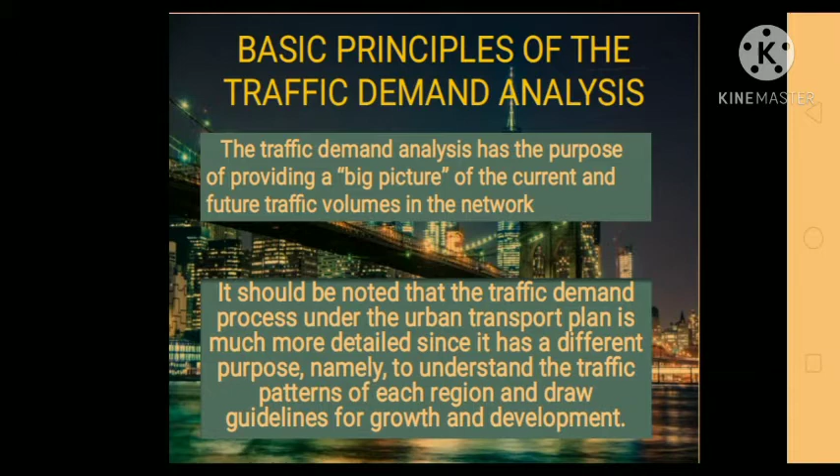Classification. Road classification is the orderly grouping of roads into systems according to the type and degree of service they provide to the public. The basis of this classification is the materials, location and function, traffic volume, economy, traffic type, rigidity, and topography.

So merong 4 classification ng roads sa neighboring countries in Asia. The primary, class 1, class 2, and class 3. Primary, access-controlled motorway. Class 1, 4 or more lanes highway. Class 2, 2 lanes. Class 3, 2 lanes pero mas narrow.

Since most of the Asian highway member countries have their own design, the revised classification and standard for the Asian highway was simplified to provide the necessary minimum standards and guidelines to facilitate international road traffic. Saka yung primary class ay access-controlled motorways used exclusively by automobiles. Access to enter the motorway is at grade-separated interchanges only.

Motorcycles, bicycles, and pedestrians will not be allowed to enter the motorway in order to ensure traffic safety and the high running speed of automobiles. Sa Class 3 naman, can be used when the funding of the construction and or land for the road is limited. The type of pavement should be upgraded to asphalt concrete or cement concrete as soon as possible in the future.

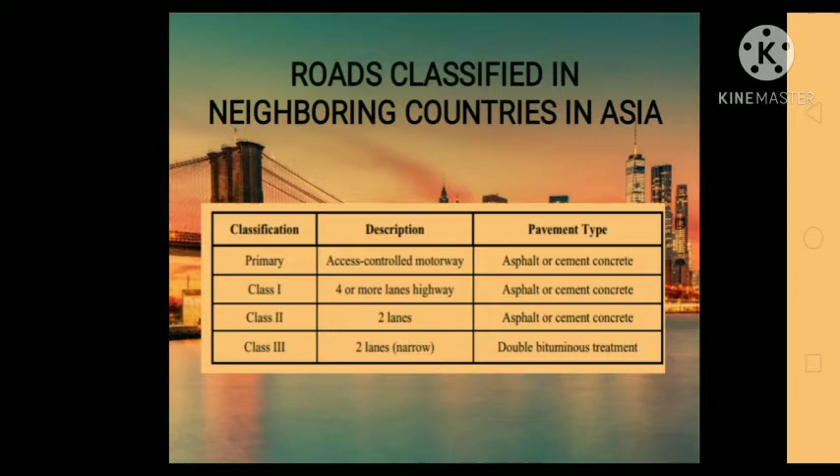Take note that the classification of road is determined as follows using passenger car unit or the PCU as an index presenting traffic volume. Sa neighboring countries in Asia ay may 4 classification of roads. Sa Philippines naman ay may 8 classification of roads.

Una ay ang national primary. Directly connects major cities, at least around 100,000 people, cities within the metropolitan areas. Pangalawa ay ang national secondary. Directly connects cities to national primary roads except in metropolitan area. Directly connects major ports and ferry terminals to national primary road. Directly connects major airports to national primary roads.

Directly connects tourist service centers to national primary roads or others. Directly connects cities not included in the category of major cities. Directly connects provincial capitals within the same region. Directly connects major national government infrastructure to national primary roads or other national secondary road.

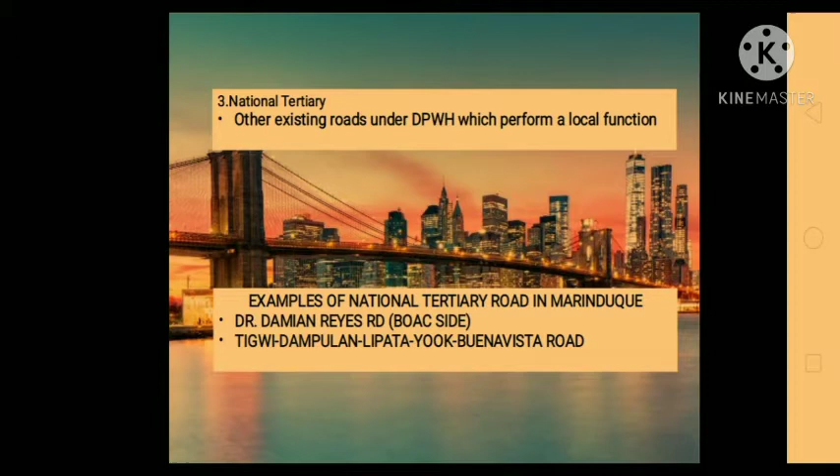Ang ikatlo ay ang National Tertiary Road. Other existing roads under DPWH which perform a local function. Ilan sa mga example ng National Tertiary Road dito sa Marinduque ay ang Dr. Damian Reyes Road, Boac side. Mula Tigwi, Dampulan, Lipata, Yook hanggang Buenavista Road.

Number 4 is the provincial roads or local roads. Connect cities and municipalities without traversing national roads. Connect national roads to barangays through rural areas, connects to major provincial government infrastructure.

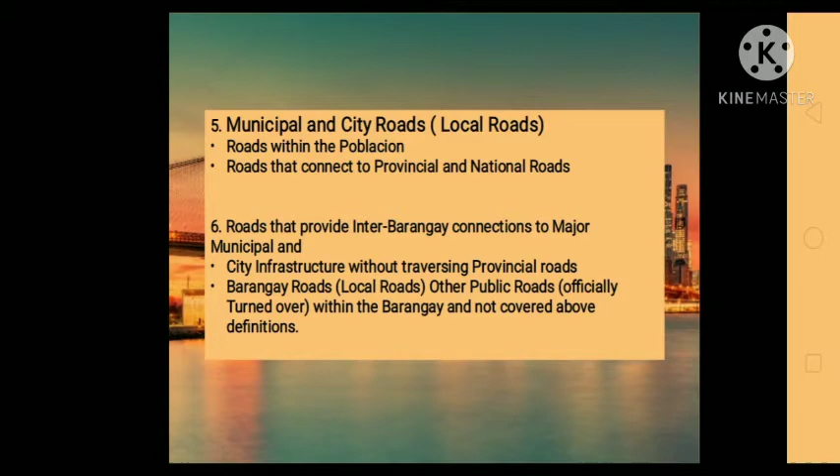Ikapito ay ang expressways, highways with limited access, normally with interchanges, may include facilities for levying tolls for passage in an open or closed system. Pangwalo ay ang bypasses. Bypasses are roads or highways that avoid the built-up area, town or city proper to let through traffic flow without interference from local traffic, reduce congestion, and improve road safety, where a toll for passage is levied in an open or closed system.

So, ilan sa mga bypass road dito sa Marinduque ay ang ongoing construction of Boac-Mogpog Bypass Road, ongoing construction of Gasan Bypass Road including right-of-way and bridges.

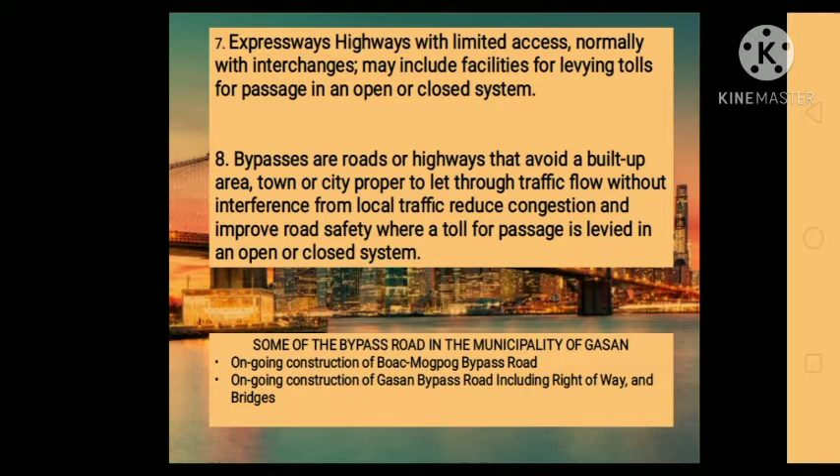So, ang next naman po ay ang road patterns. Road patterns are very essential in the development of the settlement of a city. However, recently, development in cities does not give importance to the study of road patterns, giving rise to numerous roads that are not interconnected. Housing and commercial developments are built far away where roads are very distant from the center of the town. The increasing distance between the residential and commercial hub of the city increases the dependency upon cars for the daily travel chores each household member makes frequently. The road patterns also increase the response time emergency response vehicles take to reach a certain place.

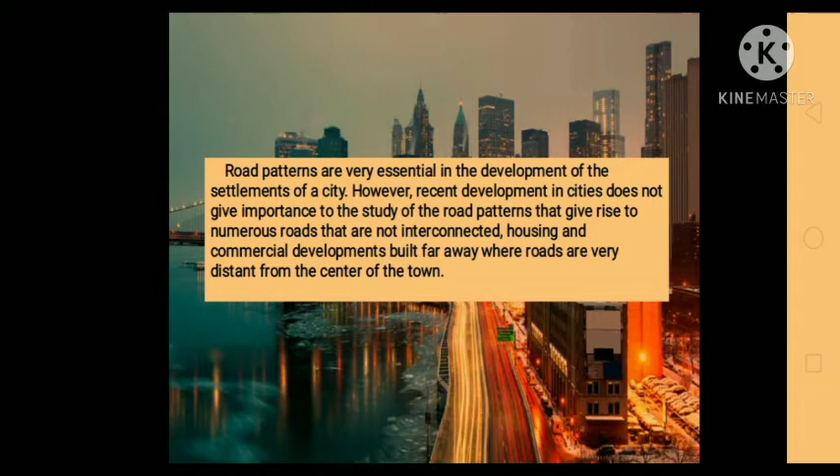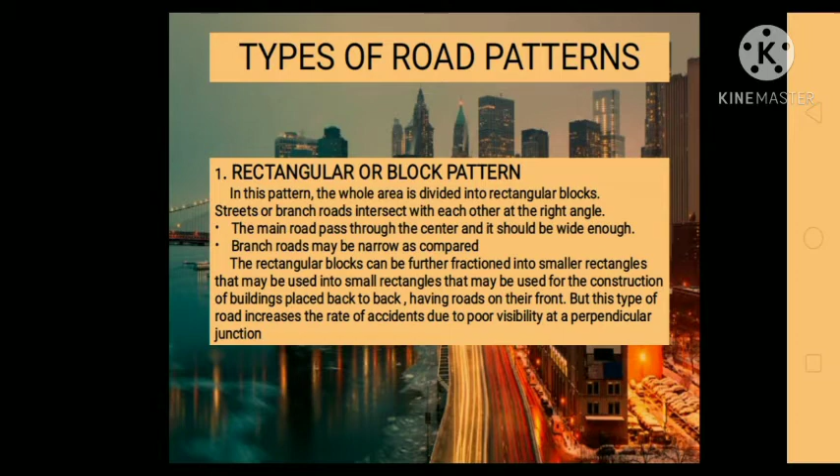There are 6 types of road patterns. The first one is the rectangular or block pattern. In this pattern, the whole area is divided into rectangular blocks. Streets or branch roads intersect with each other at right angles. The main road passes through the center and it should be wide enough. Branch roads may be narrow as compared. The rectangular blocks can be further divided into smaller rectangles that can be used for the construction of buildings placed back to back, having roads on their front. But this type of road increases the rate of accidents due to poor visibility at a perpendicular junction.

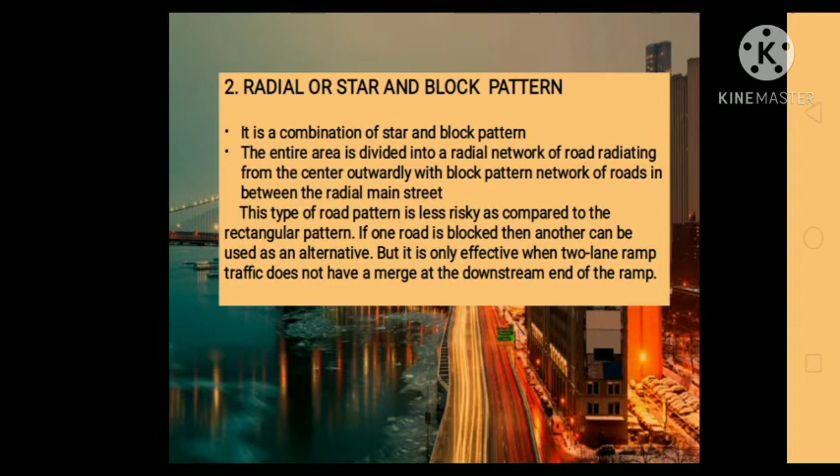The third one is the radial or star and circular pattern. The main roads radiate from a central point and are connected with concentric roads that are also radiating outwardly. Using a circular pattern in place of traffic signals reduces the possibility of rear-end crashes. But this type of pattern affects the driving ability. Mainly old drivers face this problem due to declines in vision, hearing, and cognitive function.

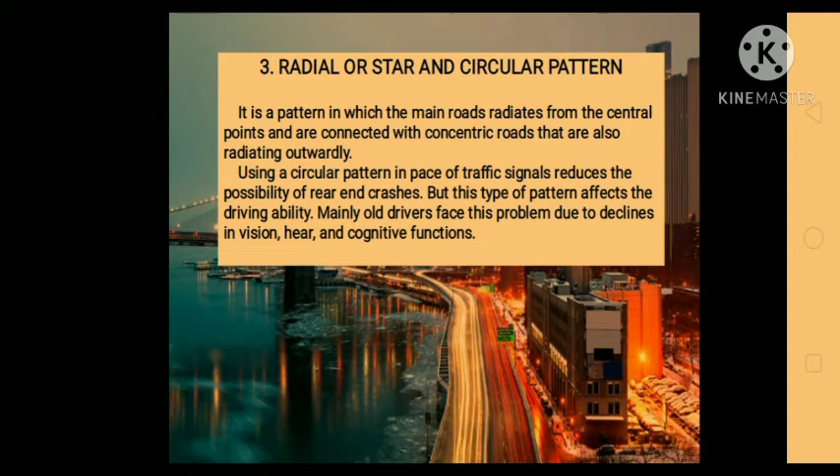Number 4 is the radial or star and grid pattern. A radial network of roads originates from the center outwardly. Then the main radial streets are interconnected by providing a grid pattern. This type of pattern increases the efficiency of land usage and unit density. It provides high safety to vehicular traffic with a high proportion of three-way intersections.

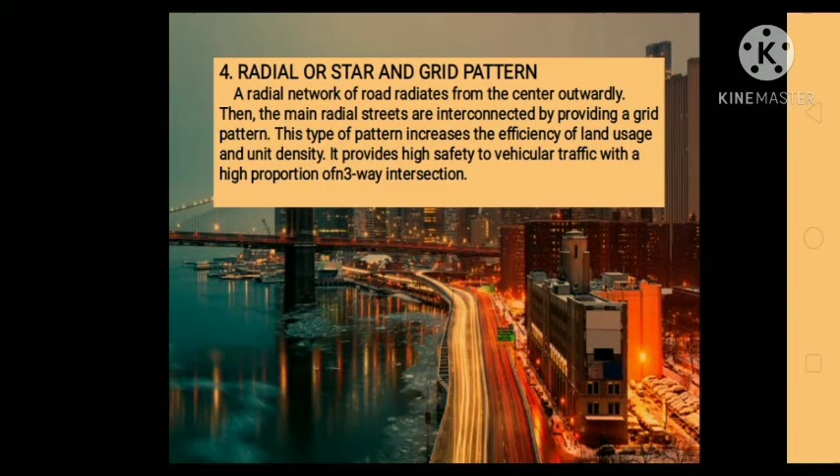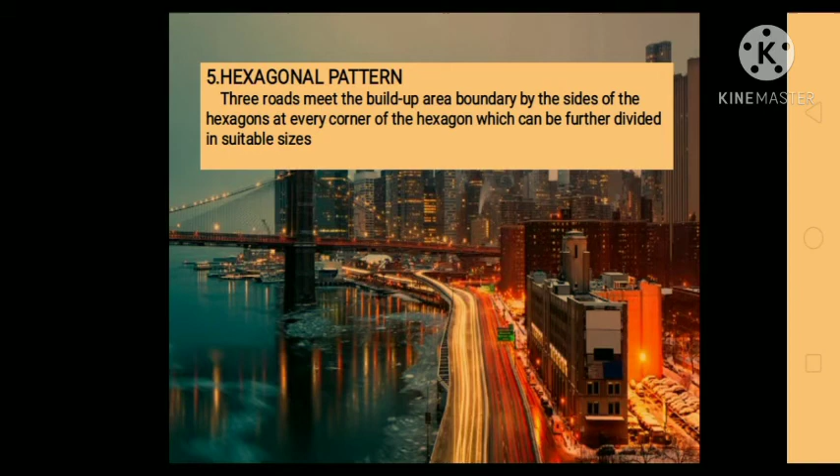Number 5 is the hexagonal pattern. Three roads meet the built-up area boundary by the sides of the hexagon at every corner of the hexagon, which can be further divided into suitable sizes. Number 6 is the travel pattern. The city center is connected with the suburban center and neighbor centers with the shortest road. To make the road short, road alignment is made straight.

So why are road patterns important in highway planning? Ito yung ilan sa mga dahilan kung bakit ang road pattern ay importante sa highway planning. Una, it prevents traffic accessing local flow routes in the direction of the event venue that operate in favor of egress traffic flows. Roundabouts improve the efficiency of traffic flow. They also reduce vehicle emissions and fuel consumption. It also improves land use efficiency and unit density. Also, serious crashes are essentially eliminated.

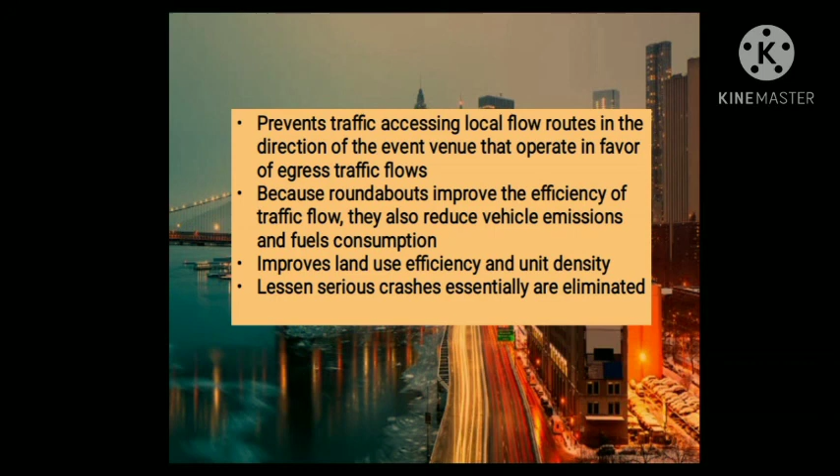Traffic congestion and motor vehicle crashes are widespread problems, especially in urban areas. Roundabouts, used in place of stop signs and traffic signals, are a type of circular intersection that can significantly improve traffic flow and safety. Knowing the road patterns is of great help in planning urban highways. The choice of the road pattern depends on the extent of land use or the distribution of residential, industrial, and commercial areas in the city. The nature of the terrain influences the study of road patterns in the expansion of well-planned cities. Classification. Classification is the orderly grouping of roads.